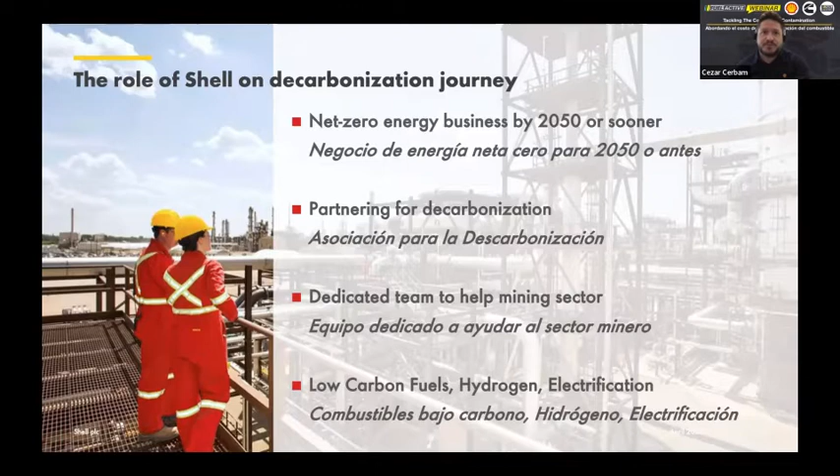About the challenges in delivering fuel to mining without contamination. Well, the challenge starts with the distance between fuel source and mining sites. Refineries, fuel installations, distribution points usually are hundreds or thousands of miles away from the consumption point. We produce the most pure, clean diesel in the plant, assure it has a high filterability and other inherent properties, but the journey can expose fuel to contamination.

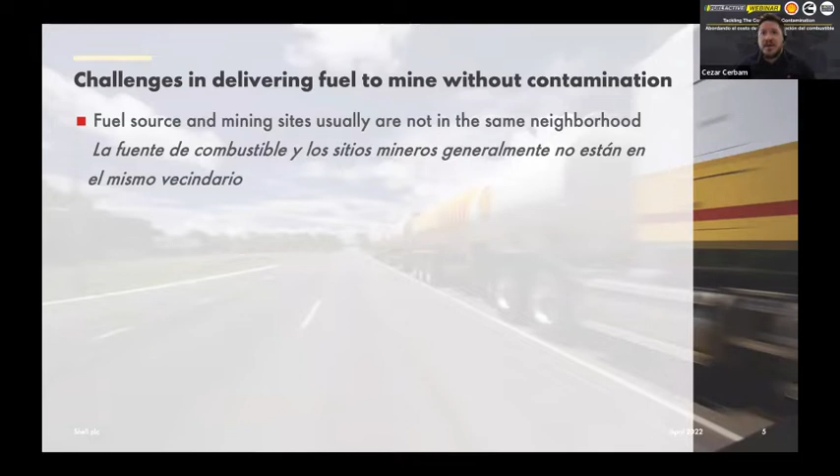Even using special features such as breathers and desiccants in the trucks, the supply chain is lengthy and often multi-staged, and there are many opportunities for contamination. Freight preparation, land transportation, delivery at site, and fuel distribution on operation are properly planned, executed, and audited by Shell.

Diesel cleanliness historically has been measured by gravimetric and more recently migrated to particle count, a procedure very well known and used in the lubricants business. Fuel cleanliness is very important to customers, and cleanliness levels have been requested in a lot of our fuel contracts.

And sometimes the typical cleanliness level on delivery can be ISO 21/19/16, and some contracts determine ISO code 16/14/12 and a maximum of 100 milligrams per kilo of moisture. That means that the regular fuel could be 30 times more contaminated than required by OEMs and customers.

During the whole supply chain, we assure fuels and lubes cleanliness by certifying all processes through tank and pipe decontamination, homogenization, decantation, draining, and sampling. Operations in aviation are the most restricted in terms of liability. Shell being a major operator in that field, we can use the most advanced techniques and procedures in jet fuel handling to manage diesel delivery in mine sites.

It starts with a proper settling time to allow dirt and water to settle down, adequate storage tank capacity, tank floor sloped with a drain at the lowest point, frequent draining routines, suction pipe above the floor level, or even floating suction pipes that will be covered by Thomas from Fuel Active.

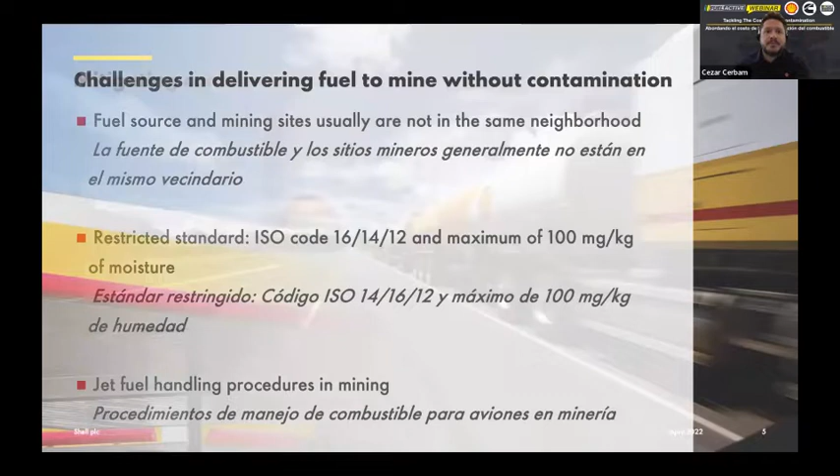The handover point is the critical link of the chain. The different steps between the storage tank on the site and the delivery to the vehicle can be affected by different variables that impact the cleanliness process and filtering infrastructure, such as type of contamination, particle size and intensity, and operational conditions at site. And this comprehends not only the fuel and equipment, but also procedures and people behavior.

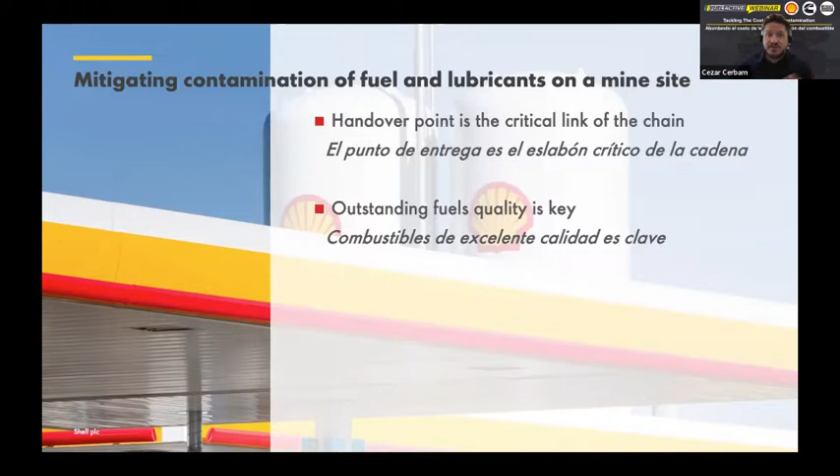Using a high-quality diesel can make a huge difference in the operation. Filterability, corrosion protection, lubricity are key properties, and those aspects will be even more important when we work with biodiesel and other biofuels coming from different sources, such as vegetable oil, algae, tallow, animal fat, and other biomass.

It's important to implement proper control measures, monitor sources and presence of particle matter, free water, and microbiological growths. Assure the right cleanliness requirements according to OEM and operation specifications. Apply the respective filter elements considering needed flow and beta ratios or removal efficiency. Perform gravimetric millipore analysis. Consider also using microfilters, water separators, and inline devices or portable labs.

And the last, use technology to your advantage. There are modern devices that help to monitor and avoid contamination across the whole distribution chain within a mine site. In the Shell services portfolio, we have a wonderful digital solution called the Shell Remote Sense that monitors the lubricant condition, occasional contamination, and equipment wearing particles in real time, helping maintenance and operation to act before a failure.

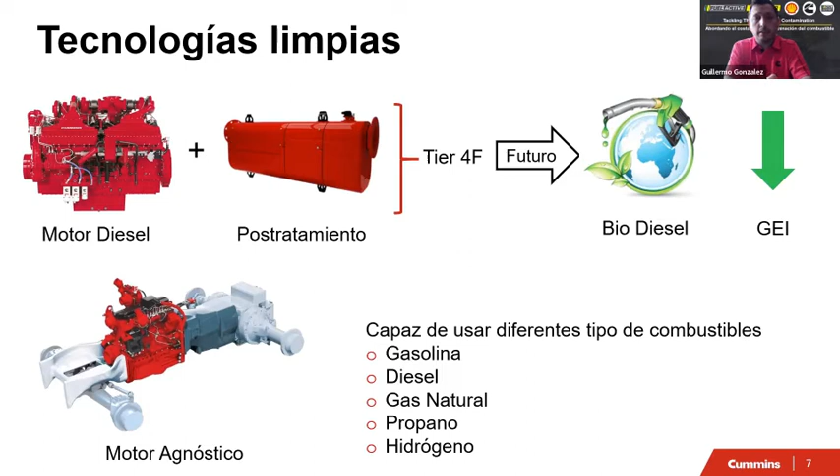Thank you, Guillermo. Thank you, Guillermo and Cezar, for both your very interesting perspectives on the cost of fuel contamination from two very different companies, and also for talking about the decarbonisation strategies you're both pursuing between now and 2050.

Over the next ten minutes, I'll talk about how reducing the impact of a diesel engine should be a key part of your decarbonisation strategy, and how Fuel Active can become part of that, reducing the impact on your diesel engine.

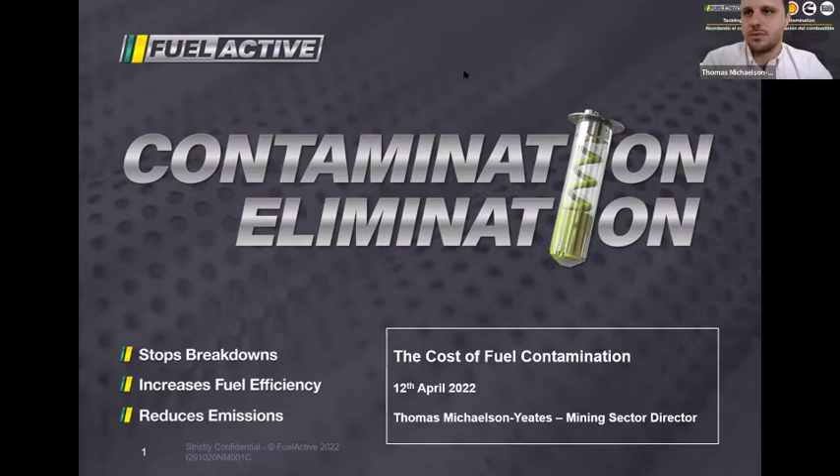Firstly, it's worth pointing out where people are and what decisions people are making. Most large and mid-scale mines have signed up to achieve net zero by 2050. To do so, people have already created, or are now creating, their decarbonisation strategy, looking to use different technologies to develop electricity from solar and wind, as well as looking at what technologies are available for their mobile assets, everything from EV to hydrogen. There are multiple new technologies out there, and mines are choosing the technology that fits their business most successfully.

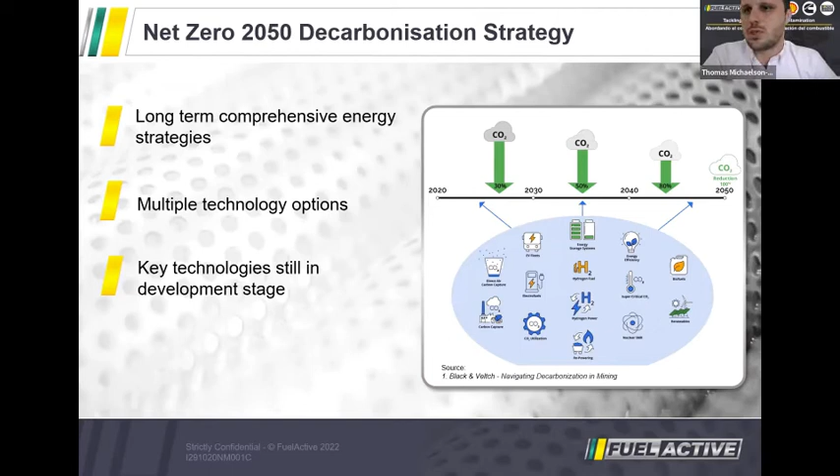It's also key to point out that most, if not all, of these technologies are early stage technologies, and between now and 2030, a lot of them are being piloted to see if it's possible to scale them up to full adoption across the mine.

Currently, to date, there are over 50,000 90-ton diesel haul trucks in operation in mines globally, and if we are going to maintain mining between now and 2050, all of these 50,000 diesel haul trucks will have to be replaced with other sources of fuel, such as hydrogen and EV.

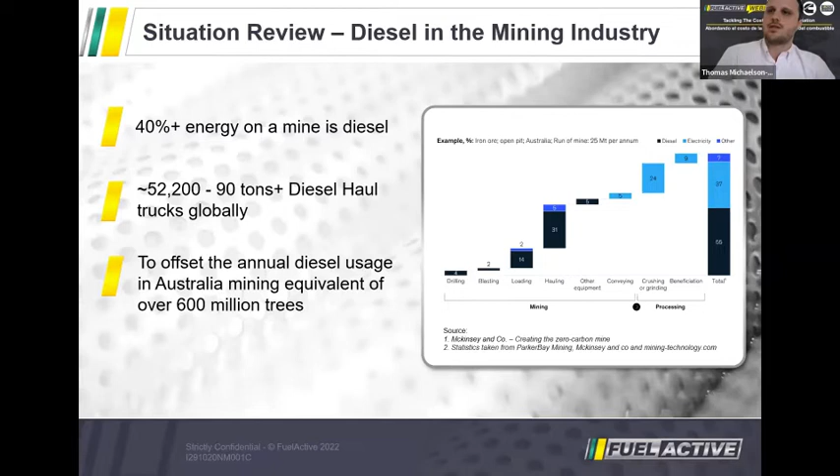It's also important to note that to achieve the electrification and net zero we're aiming for, mining actually has to increase in certain metals such as copper. That's obviously long term. It's also important to see that just in Australia alone, and many regions will be similar, to offset the annual diesel usage of that country in the mining industry, you'd have to plant 600 million trees. So the most important thing long term is to accelerate these sources of alternative fuel and move to the net zero aim.

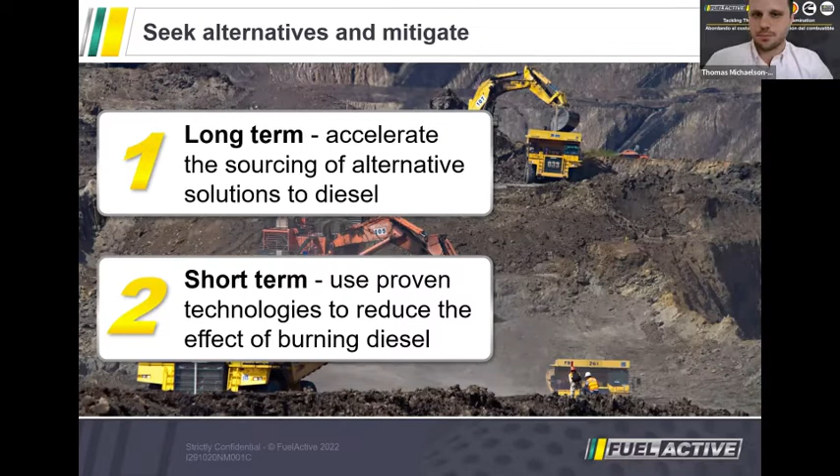But we also need to look short term and look at these proven technologies in the mining industry that are going to reduce the impact of our diesel engines, rather than waiting 25, 30 years. When I looked at these different technologies available and how we can mitigate the impact of the diesel engine, I've put them into three key buckets.

The first one, and thank you Guillermo and Cezar for mentioning it, is the movement to sustainable fuel. Multiple countries have mandated this, such as Indonesia, where they use B30 fuel, and other regions such as Brazil in Latin America, where they're moving to biofuel. Biofuel can reduce nearly up to 78% of carbon emissions in comparison to diesel, and therefore is an important strategy to move across within the mine.

The other one is technologies to improve processes in a mine. So everything from changing drivers' behavior, to looking at the mine plan and how we can reduce diesel use, to trolley assist systems that you find within a mine. And then lastly, this is where Fuel Active obviously fits in, is how do we improve the quality of fuel and reduce contamination?

Just in Fuel Active alone, we've seen up to 6% decrease in fuel consumption on mobile equipment, which could mean nearly up to 6% reduction in emissions from your diesel equipment.

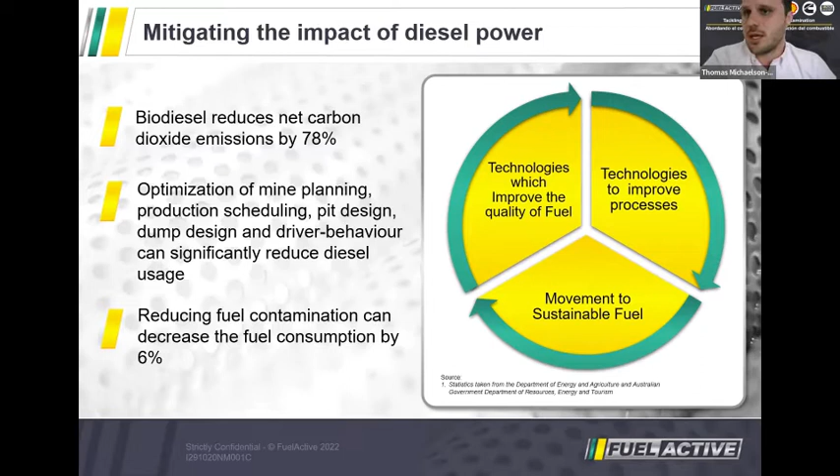So when contamination gets into your injectors, it causes three big impacts. It can create downtime on equipment, it can increase the emissions of your engines and injectors, and it decreases the fuel economy on your site. So if you put in cleaner fuel, you obviously reduce that impact.

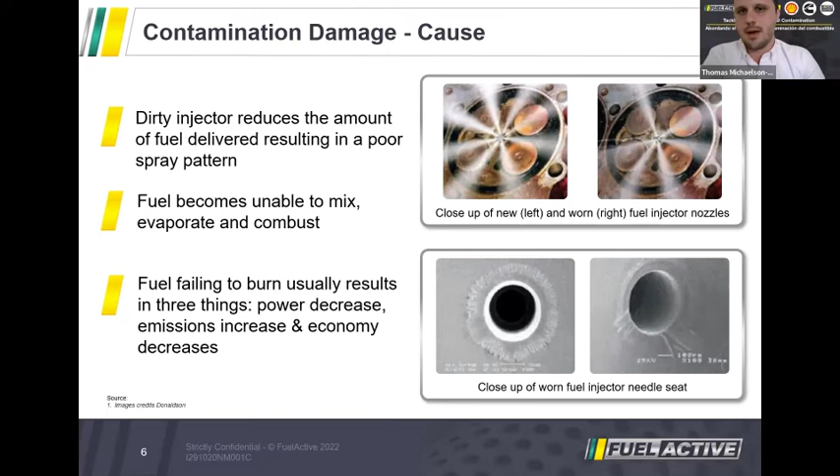So I'm now just going to play a video which talks a bit about how Fuel Active technology works. During that video, I'll stop it a couple of times just to talk through exactly what that video is showing.

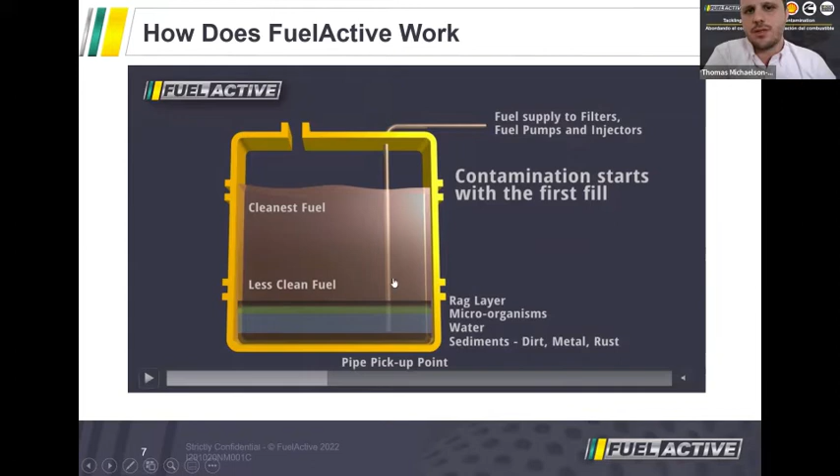So what you're seeing here, and it was a very similar image to what Guillermo showed on his slides, is this is a fuel tank, and inside the fuel tank you have a fuel line that goes into it, and then this is the breakout of diesel within the fuel tank. The cleanest diesel, because it's the lightest, will always sit on top of the fuel tank, and then what you have is the water, created by condensation, and the sediments, the dirt and rust created by contamination that happens on a mine. From when you're refilling, you'll get dust and other matter inside the fuel tank. Then between the water and the diesel, you get this rag layer, which creates issues on your filters and into your injectors.

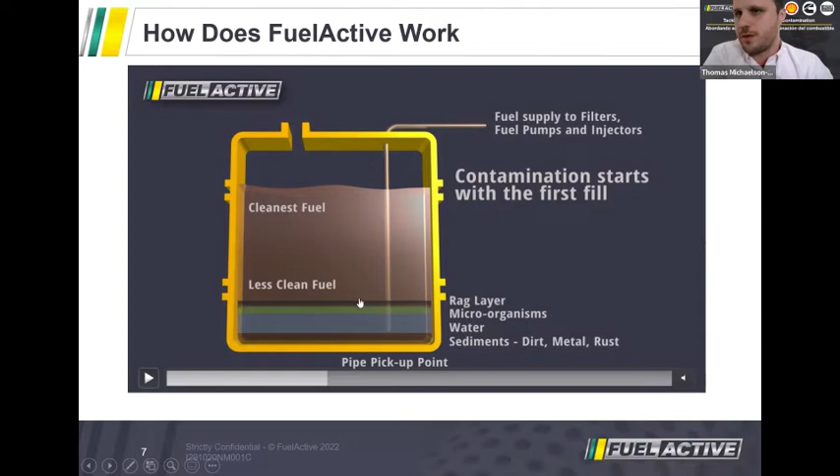This is the normal standard fuel line you'll have in all equipment within the engine, and what this does is it acts like a straw. Because it acts like a straw, it always creates that pressure point around the bottom, which means it's always sucking up the dirtiest fuel at the bottom of the tank. So even where you have high quality fuel inside the tank, it's always pulling the fuel that has a poor ISO code.

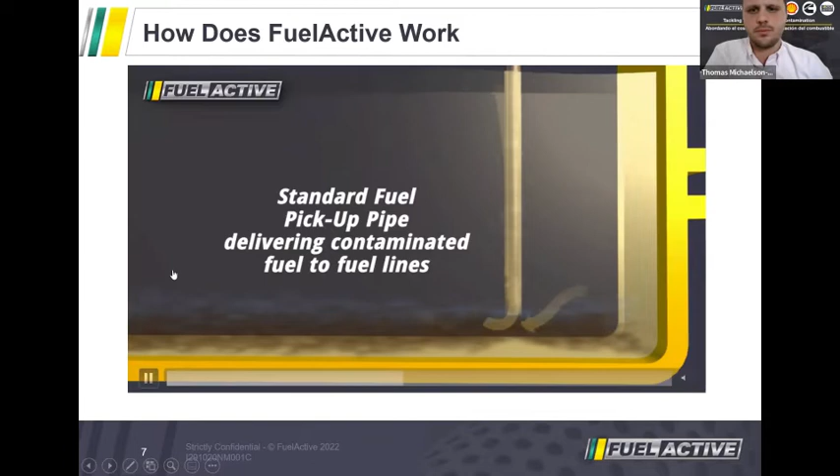So this is the fuel active unit. Fuel active is a floating pickup pipe. It sits on top of the available fuel within the tank. Whether there's 10% fuel inside the tank or it's a full tank, it will sit at the top of the available fuel, always pulling the cleanest fuel into the filters and onto the engine.

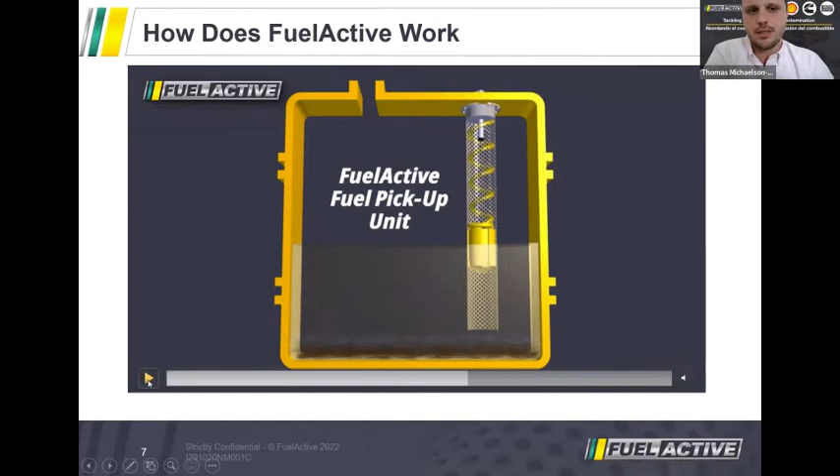What you see here is slits in the side of the float, instead of the hole at the bottom of a normal fuel pickup pipe. This doesn't create a pressure point around the bottom, which means it's pulling the fuel down from the top instead of pulling the fuel from the bottom of the tank, therefore pulling the cleanest fuel.

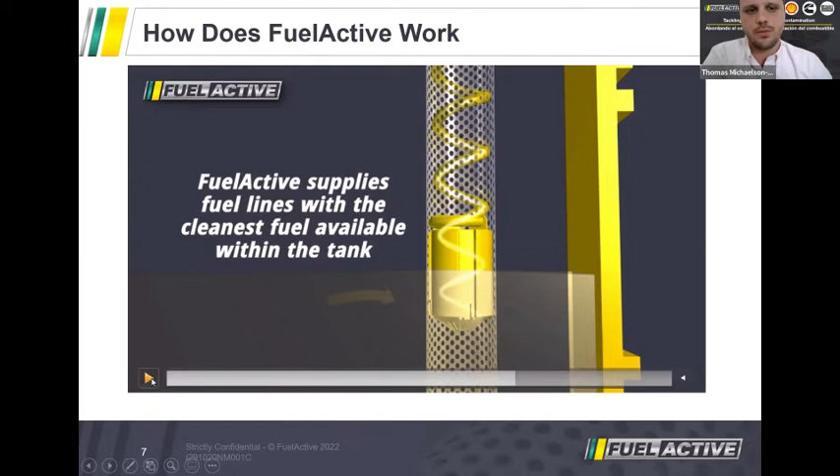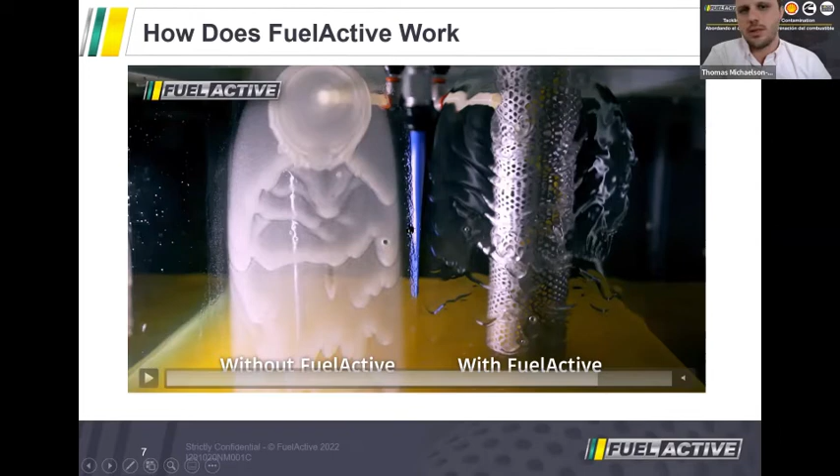What you're seeing here is in our innovation center in the UK, we have a demonstration unit which has diesel in the bottom. It has the fuel active unit going into it, and then it has a normal fuel pickup pipe going into it. Instead of feeding into an engine like you'd see on any piece of equipment, it's spraying the fuel against the glass to show you the water, condensate, and contamination that's been pulled up within a normal fuel pickup pipe, in comparison to the fuel that fuel active allows into the engine.

So just a bit about what fuel active is and isn't. Fuel active is not a filter and does not replace the fuel filter, which is still a very key part in reducing contamination. Fuel active requires zero maintenance, and therefore it's very much a fit and forget product. Once it's installed, there's no need to change it for the life of the equipment it's installed on. It's a very simple and robust technology, perfect for high industrial industries such as the mining industry, and it has a long operational life.

The fuel active unit can be installed into any industrial diesel engine, and thousands of units have been installed, from small equipment such as a 20 kVA generator, all the way up to very large mining equipment such as a 400-ton haul truck.

The key components of the fuel active unit are the baffle tube, which protects and guides the fuel active float to move up and down inside the fuel tank; the float, which has a fuel chamber in the bottom, meaning it always sits below the diesel within the tank but also floats up and down with the top of the fuel; the fuel hose, which moves the float up and down; and then the top plate, which connects to the fuel line going into the engine.

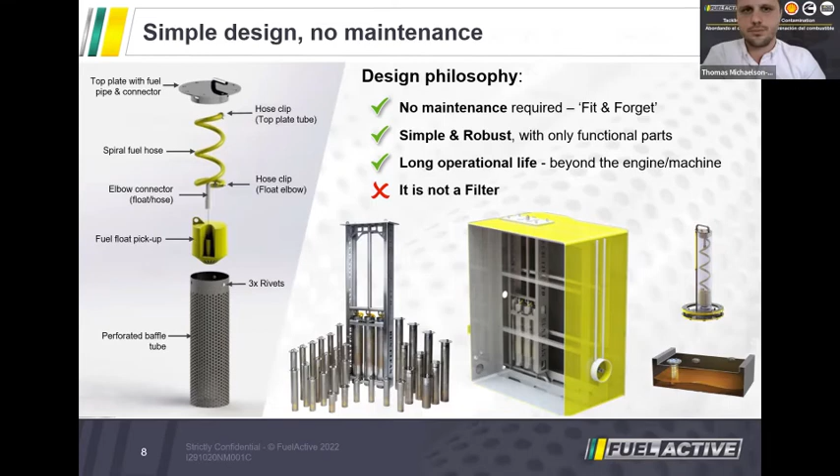We believe fuel active can be a key part of a decarbonisation strategy. We all know the different pledges mines have made, and most of them have similarities, everything from piloting net zero vehicles, reducing carbon intensity by 2030, and obviously then going on to net zero. By reducing the impact of the diesel engines we have now, we can see an immediate reduction in carbon footprint, anywhere from 3 to 5%. This provides a very clear return on investment because it reduces the amount of diesel you're using within your operation, and it requires zero maintenance.

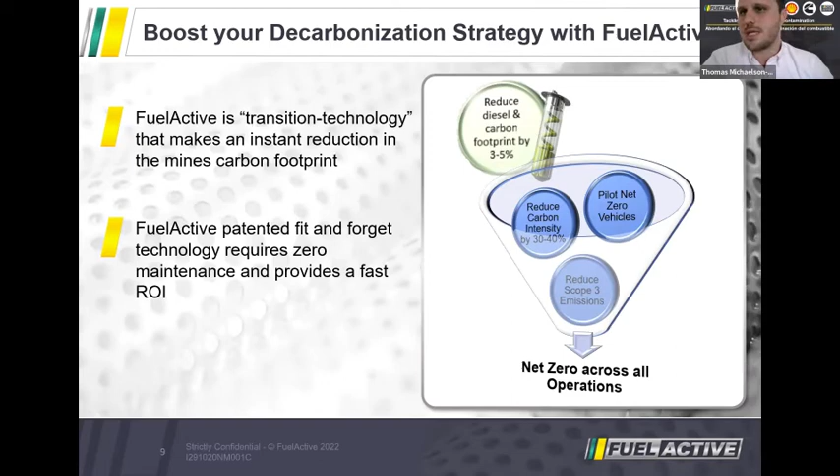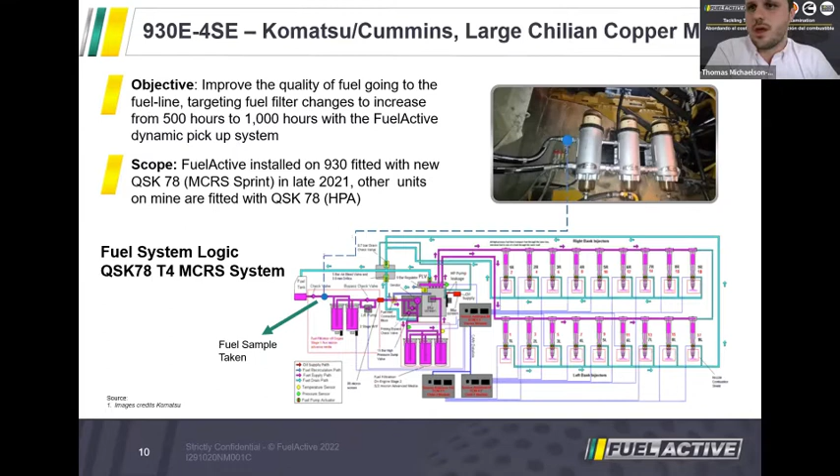Here is an example of when Cummins and Fuel Active have worked together in the past. This was at a large Chilean copper mine where Cummins and Komatsu had the Komatsu 930, installed with the Cummins QSK78 engine. The objective of installing Fuel Active was to increase filter life from 500 to 1,000 hours.

One of the reasons it wasn't achieving that is because the ISO 4406 fuel cleanliness getting into the engine was actually outside of spec. So, obviously, it wasn't achieving the required ISO code which the Cummins engine needs to deliver its high level of performance. But after the Fuel Active unit was installed, we saw the ISO code improve, which gave the necessary level of performance for the Cummins engine.

The MCRS Sprint engine on the Cummins is expected to deliver a 3% increase in fuel efficiency over their previous engines. With Fuel Active working with Cummins to improve fuel quality, we saw a 9.6% benefit in fuel efficiency, of which 6% was down to the improved quality of fuel, which Fuel Active played a key part in.

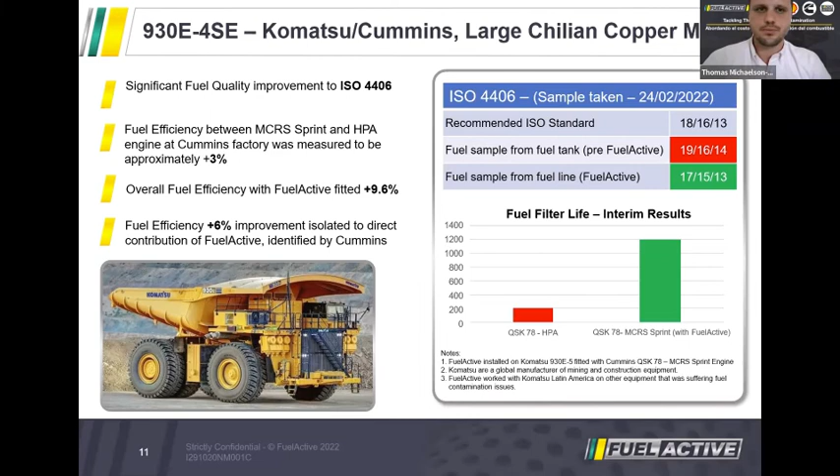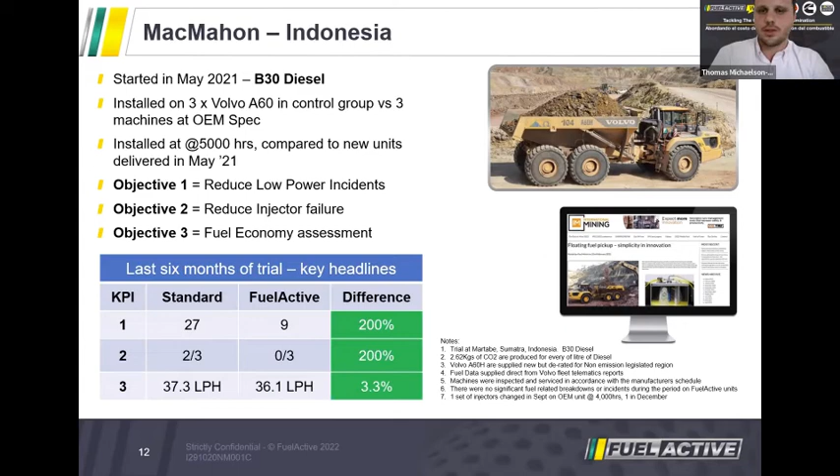Well, thank you very much to all of our speakers. I think it was a really nice flow from the challenges of delivery of clean fuel into the impact of contamination, and then Tom finishing off with a partial solution in the mining sector to some of the challenges that have been highlighted.

So the first question came from E. Souza, which was relating to biodiesel. And I'm going to let Cesar, first of all, address that question, if you're happy. Thank you, Max. And thank you, Edevaldo Souza, for the question. He asked it in Spanish, so I'll answer in Spanish, okay?